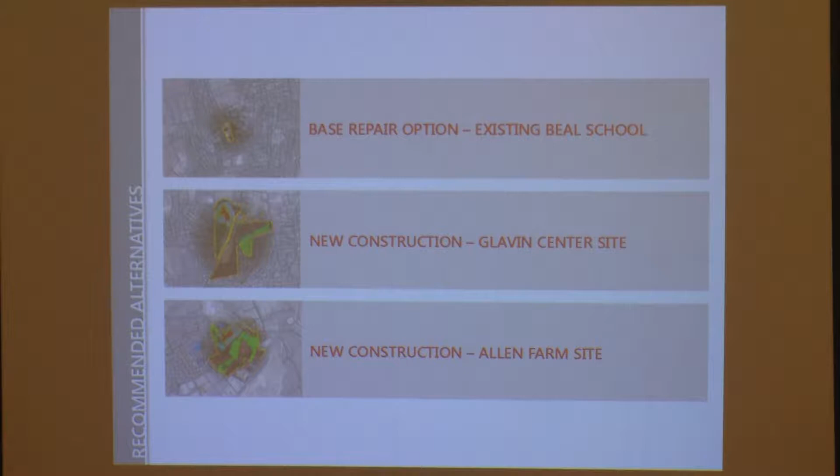We've been working with district representatives for the school, and we've also been working with town representatives. We came up with an educational program that was written by the school department and headed up by Amy Clowder. That education program really informed what this building is going to be and how it's going to support the education model.

From there, we looked at 31 sites to begin with. We got down to 6 sites that comprised 8 different parcels. Then we were down to 3, and now we're actually down to 2. The 2 sites we're down to are the Glavin Center site and the Allen Farm site.

As part of the requirements during the PSR phase, we had to look at 3 different options. The first one is kind of a benchmark where we look at the base repair at the existing site, to give you a sense of how much it would cost and what needs to be done to keep that going forward. What we're here to talk about tonight is sustainable solutions we can foresee for these possibly 2 new sites, looking at new construction.

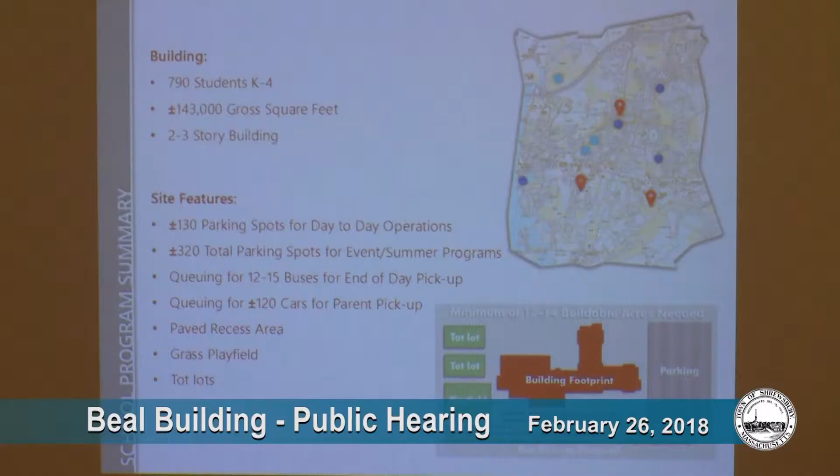What also came out of that educational program, I'm going to give you a quick background on what we're looking at as the new project goes forward. After we really looked at all the sites, we were focused on trying to provide a school in the southern portion of Shrewsbury, south of Route 9. So the two sites we're looking at both accomplish that need.

As far as the building, we're looking at a K-4 configuration. As you may recall, we were originally looking at a K-1 configuration, but the school department voted and approved to go to a K-4. It's going to support 790 students. Through our numerous iterations of the space summary template, we came up with a building of approximately 140,000 square feet, and we're looking at a 2 to 3 story solution.

As far as site features, looking at different counts at different schools for walkers, buses, parent pickup, and staffing, we're looking at needing roughly 130 parking spots for day-to-day operations, and 320 total for special events and summer programs. Some of you may know the summer program here for the extended year is very highly subscribed and popular. We'll also need queuing for 12 to 15 buses.

Parent pickup we foresee at both of these sites being quite high. It is quite high at a lot of the other schools based off the percentages, but given the location of these schools not being overly in residential neighborhoods like some of the other schools in town.

There's a paved recess area and a grass play field. To give you a sense of scale, we were targeting a grass play field similar to the size of the one at Floral Street School, for those of you familiar with the other facilities around, plus some tot lots. So that's targeting about 12 to 14 buildable acres.

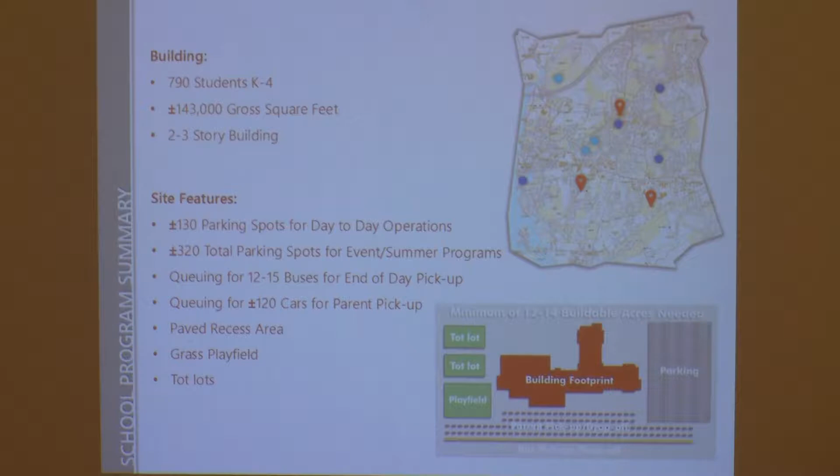What I'm showing you here is what we did during the PDP, a very early preliminary fit. We hadn't had time—and that's what we're getting into now—to come up with an actual floor plan that truly meets the educational program the district came up with.

But we came up with a footprint that was done—you may recognize it as Sherwood. We looked at it, grossing it up to the size we need here, and wanted to make sure these could at least support what we're looking at. So this was one option as a preliminary test fit, showing a circumstance at Glavin.

Another one for Glavin, looking at a slightly different orientation. And then the third one here you'll see is Allen Farm.

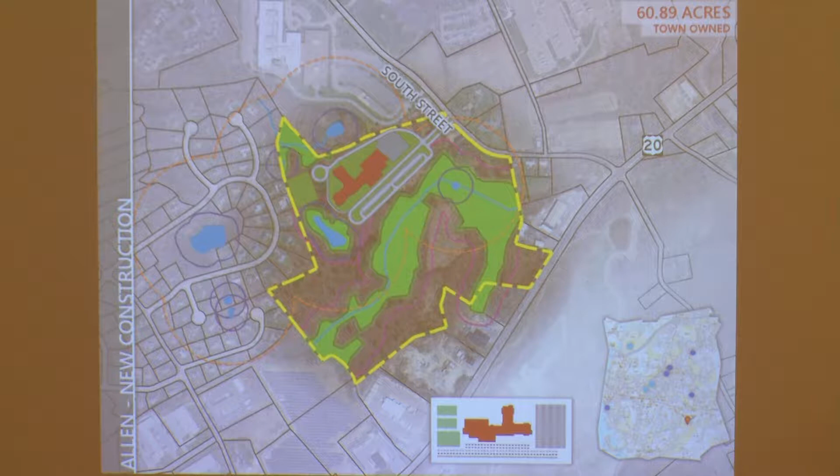As you may or may not know from previous meetings, Allen Farm has some quite large hydrology on the site—wetlands, potential vernal pools—that's really constricted the site and limited us to looking at the northern portion as developable. We foresee some site compromise probably on this site, but until we can really flesh out the building and test this site, we still think it will be able to support a school of this scale for day-to-day operations.

With that being said, anyone have any questions about what we've done to date, as far as where we are and what we're seeing? Otherwise, we're going to really try to get into the core of the program tonight.

Thank you. I'm going to invite Chris up, and he's going to take it from here. This is where the fun starts. Well, we hope this is where the fun starts.

So what we plan to do with the rest of the evening - I don't know if everyone's seen the agenda - but we were going to start with a vision and goal setting exercise to get a sense of what Shrewsbury cares about for this particular project. We have a pretty good sense of that already, but it's good to do it and create a set of shared goals through that process.

And then from that, we're going to dive into specific aspects of sustainability and work our way from the outside of the building in, talking about all the different elements that might go into this project, understanding that we're still at a very early stage. We don't even know exactly where this building's going to end up yet.

So sustainability might be one of the things that informs the decision of the site, for example. Once we go through that, we're going to talk a little bit about the different certifications that are potentially available to us. We're interested in that in part because, as an MSBA-funded project, if we want MSBA's money, we have to meet one of these certifications. So you have a choice of being a LEED project or a Northeast CHPS project, and you've done CHPS in the past in town - Sherwood is a CHPS project.

So the connection here on the larger scale—never mind the Worcester County Food Bank is right there—there are some great opportunities for the site to have that greater discussion of outreach between nonprofits, with site amenities that are in there in and of itself.

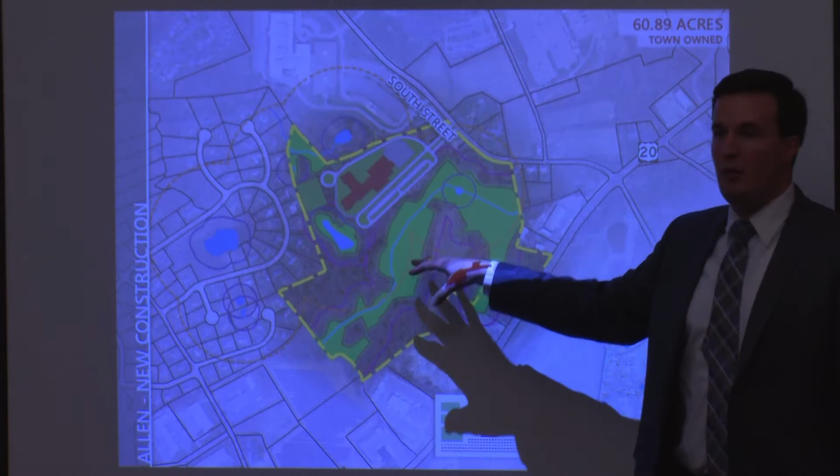And the same goes for South Street, with all of its hydrology and wetlands—it is a huge learning tool. Obviously we're going to be conscious of not disrupting or adversely impacting the wildlife, but I've always seen this as a great opportunity and teaching tool for the students. I think both sites have different opportunities to really engage students at this level, and it's very appropriate to the curriculum currently enforced in the district.

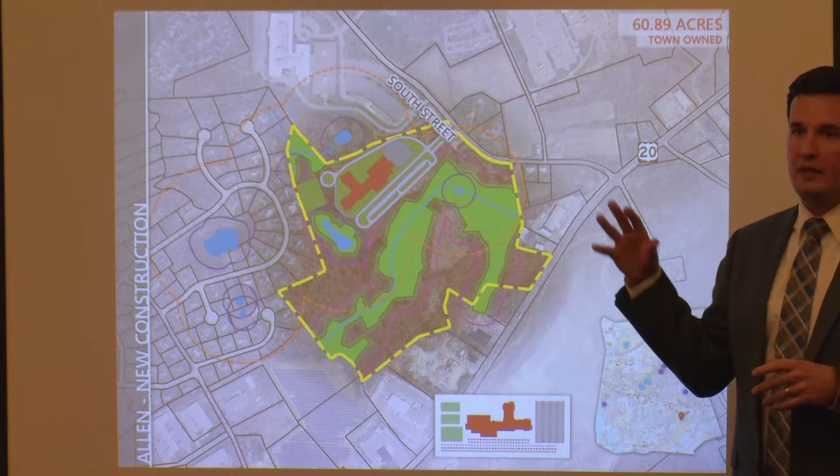At the South Street facility, you'd have opportunities for boardwalks, possibly working with community land trusts where some other programming could be. That could definitely happen, but I think in some respects it would be something that would happen after this project. Due to the permitting track, I think it could cause a lot of hiccups and delays if we try to incorporate it into the base program.

But I think it would be a great initiative for the town to entertain as an option if this site was selected to move forward. I would hate to see it become a real snag for the whole project, since we're really trying to focus on this one educational thing that could be incorporated afterwards.

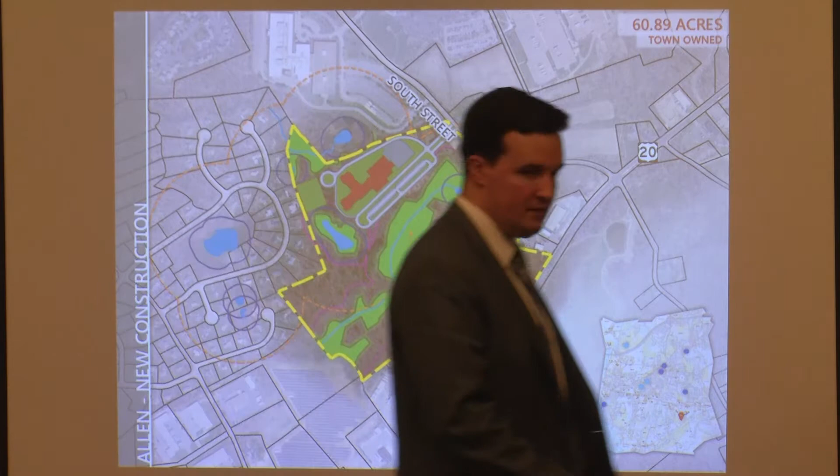So, almost everybody familiar with the two sites? Anyone not familiar with the two sites? I think a lot of people know.

Just to be clear, is there still also an option of an existing site? That is going to be the benchmark for the kind of comparison of what it would cost the town to stay in this building. So as far as the project being approved, funded, and moving forward, we're actually looking at new construction at either one of these sites. So that site's just there for a theoretical exercise? Yes. Got it.

And to really inform the town, because they have a redevelopment committee too, looking at new use for that. So I think it'll be beneficial for them to understand some of the systems, egress, or other deficiencies there.

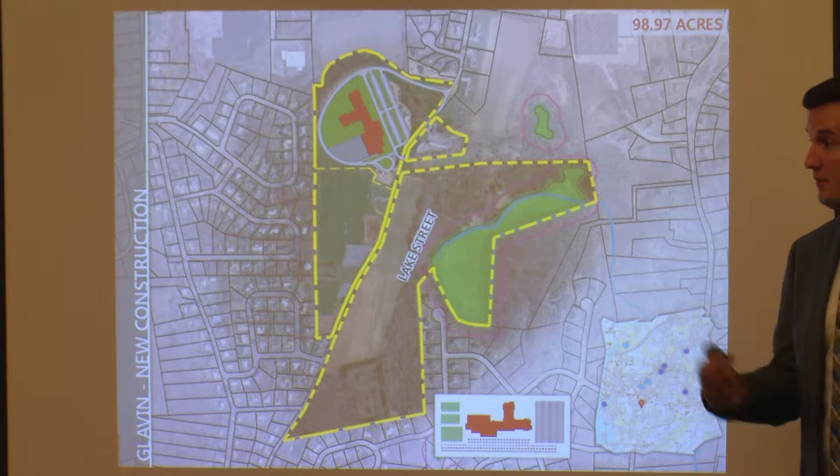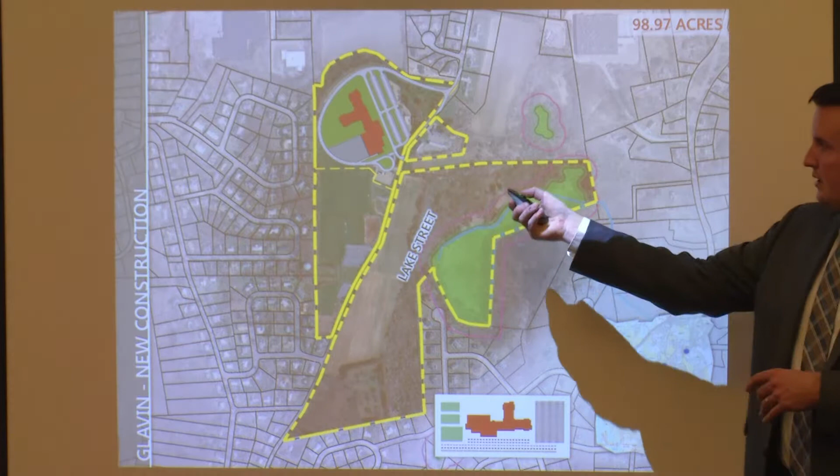Okay, so as far as Glavin Center goes, the area we're focusing on is the upper northwest portion. I don't have an existing site plan, but as you know, the Glavin Center is currently housed between three interconnected structures in this portion, and then a separate building that was a school, a kindergarten area, which was the temporary library when you guys did the library renovation, for those who may have visited during that time.

There's quite a significant change in grade here, with both vertical and horizontal road alignment issues coming through. As far as pre-construction, this used to just be a rolling hill. If you look at a lot of the topography, it used to roll right up - it was this nice rolling hill. The views out towards UMass and Lake Quinsigamond are quite nice to the northwest.

So the things we're going to be dealing with here - Jared will know - is that we've got to keep the grades between 5 and about 8% for roads. You really don't want to go much higher than that. And as you may know, for handicap accessibility, a ramp is above 5%, but to be a sloped walk, which doesn't need guards or handrails, it's at 5%. So that's another huge factor in getting access and being inclusive and welcoming to all those who will be visiting.

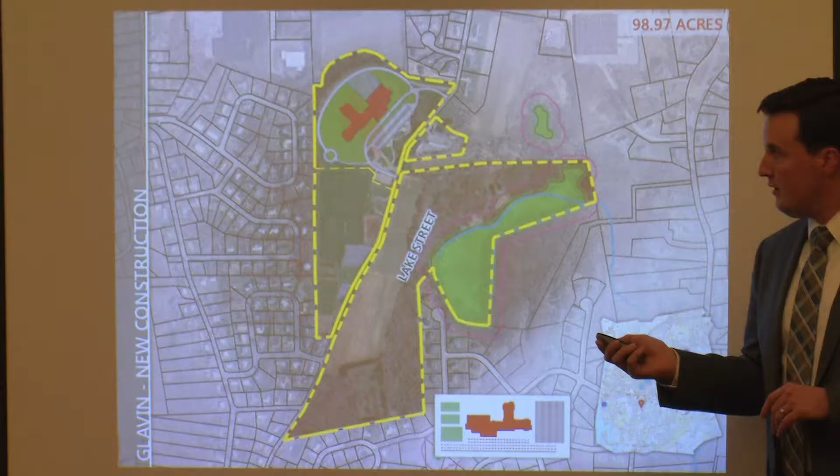I don't know if there's something you want to add at the moment. This site, I think, gives us greater opportunities as far as developable area configuration and orientation, for sustainable solutions like daylighting, capturing microclimate aspects such as prevailing winds, and even passive heating options. Whereas on South Street, we're a little more limited in how much we could rotate the building one way or another. But we could still orient windows and the building as much as possible to capture those aspects.

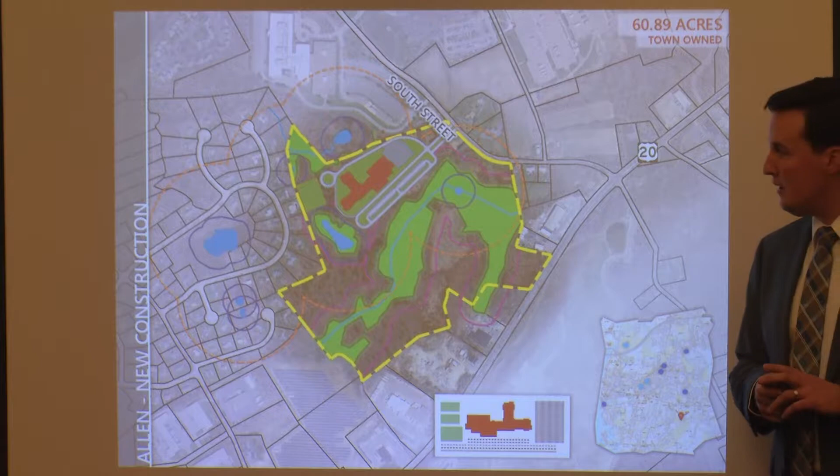This site - Jared, maybe you could comment a little bit on the stormwater strategy. Sure, could we go back to the previous two slides? We'll start with that one.

Again, Jared Gentilucci with Nitsch Engineering, I'm the project civil engineer. I don't get a lot of opportunity to talk about stormwater because people tend to fall asleep, so this is a good opportunity for me. So talking about the Glavin site on Lake Street - from a stormwater perspective, this is actually a pretty good site. One of the big benefits is it's already developed. We have a lot of structures there, a lot of pavement.

Sean mentioned there's some topography change across the site, but we can usually manage that with grading throughout the site - we can make that work. The fact that it's developed helps on the stormwater side because we already have existing flow on this site. We have a lot of parking lots, roadways, and buildings. We're looking to basically do a similar type of site - obviously much different design, layout, and facility - but from a stormwater perspective, it's very similar.

We don't have great soils on this site - the other site's very similar, we'll get to that in a minute. So we have fairly low permeability rates in the soil, so we're somewhat limited in what we can do with recharge. We always like to promote recharge and sustainable, low-impact development options for stormwater - things like water quality swales, bioretention basins, porous pavement, and so on. If you have sandy soils, you can implement those to your heart's content and they usually work really well. You can still use them on a site like this, but with low permeability soils they don't work quite as well, though we can still get some benefits from it.

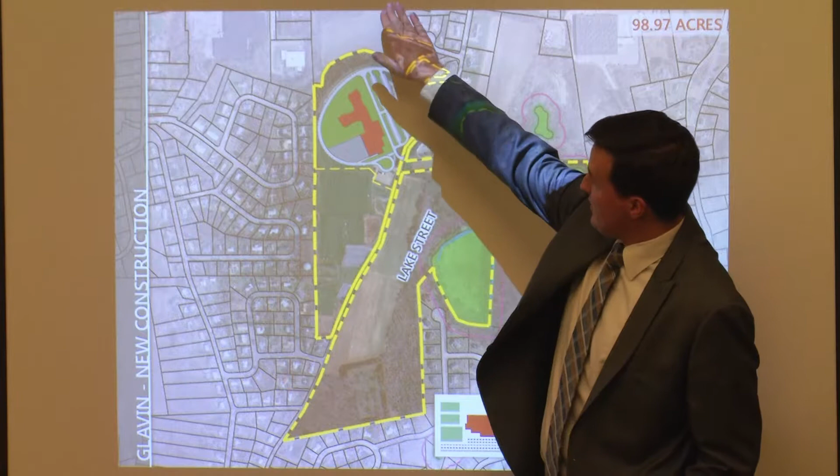Those that may know might notice that the land that's off here is actually up for lease right now, but it was actively farmed previously, and it abuts the Worcester County Food Bank, which has their main hub right there.

Is there any site contamination? Are we going to dig and find out we need to get rid of oil tanks or something else on site? Do we know anything about that?

In the meeting we just had prior to this, we've been actively gathering more information on the sites as we go. We did a phase 1 assessment of this site already. We did a desk study for the geotechnical. We were fortunate that they had the boring logs in locations from when they did the original construction, so we're using that to suffice for geotechnical soil capacities at this point.

As far as what came of the 21E, in this smaller portion where there's some barns and storage facilities, there's one underground storage tank a permit was put in for, but there's no current records if it actually even went in. So that's really the one thing we got to look at.

One thing we're looking at in general for both of these sites is that Shrewsbury has high arsenic levels in general in the soils. We are going to be testing for that, so we can understand what we can or cannot do with the soils on-site or off-site. But there's nothing of huge red flags, like mercury or something else—they weren't using or manufacturing pesticides or other nasty stuff at this point.

I could speak to the arsenic a little bit. We deal with arsenic levels really in Worcester County on a lot of projects. I have multiple projects right now, actually working with Lamoureux Pagano on Worcester South High, and we have a lot of arsenic in the soils there too. It's not considered contaminated necessarily, but it's naturally occurring, and you do have to deal with it.

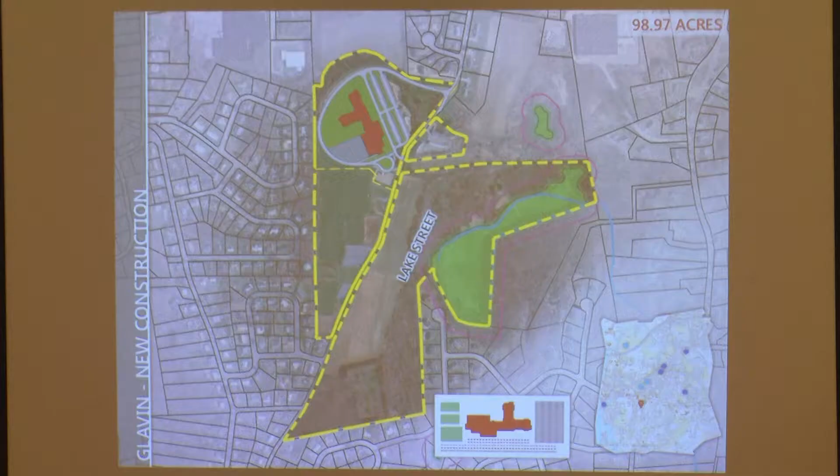Just to clarify, we plan on doing this for both sites now, and it's really going to be a traffic impact study. It'll look at the existing loads—real counts as they exist now—and then the theoretical loads, which is all we can do for the school, and the trip generation from it. That's what Niche will be doing with us.

I have two comments about that area—I'm very familiar with Lake Street. There are two things going on there. As you go south, down on your map, that area floods really bad, and the drains get clogged up very easily. There's also a certain time of night it fogs up pretty fast. And there's a lot of wildlife up there—hordes of turkey. They come out around dusk and they're all over the place, a lot of them.

Yeah, I saw two turkeys this evening behind the funeral homes. Yeah, a lot of turkeys. And I think because of the turkeys, there are also coyotes that howl at night out there. So just put that on your checklist or something.

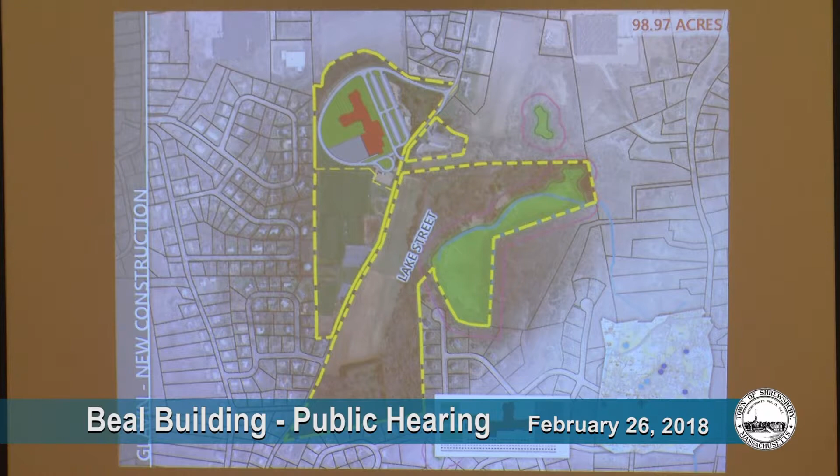Just to speak to the stormwater part—so that's further south on Lake Street? Yeah, it's Hilaire Street. As you come down, it's right where you can take a right and go back there. Every once in a while that gets bogged down.

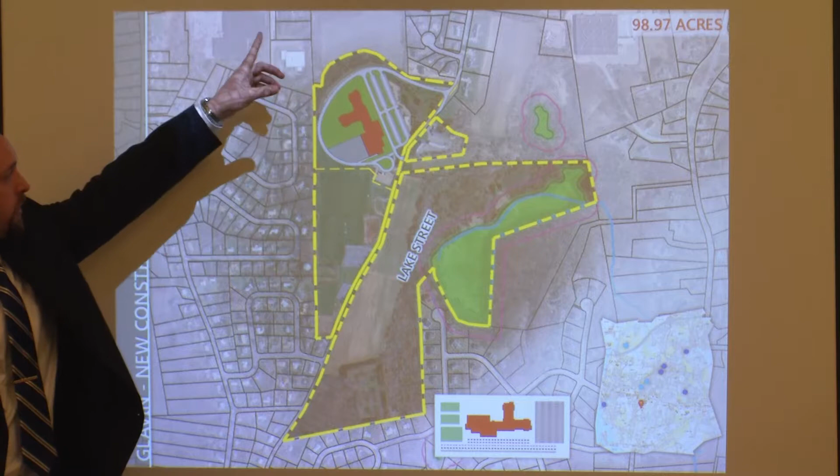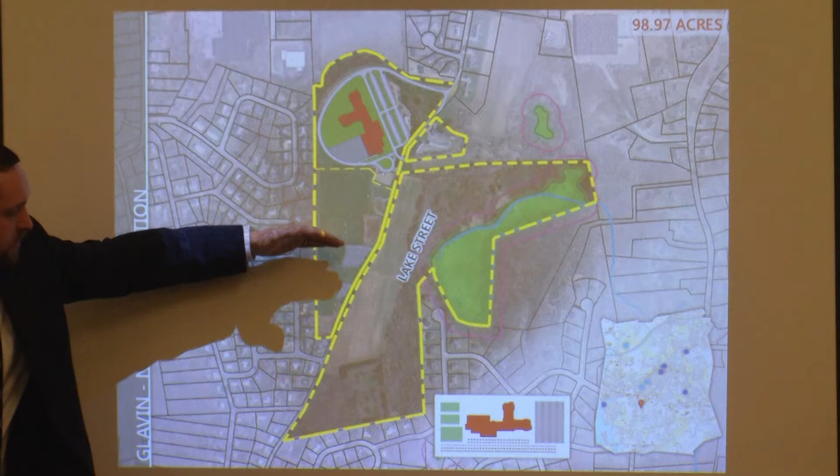Flooding issues, yeah—so is what you're proposing there going to help that situation? It absolutely will; we certainly wouldn't make it any worse, and our goal is always to make it better. A lot of stormwater on the existing site in the northern part actually runs through a drain line in an easement that I believe goes up to Route 9, so a lot of stormwater goes out there today. We like to mimic where stormwater flows—we don't like to change flow patterns or the amount of stormwater that goes to design points. We'd try to mimic the existing condition. Topographically, a lot of this area and most of the field pitches this way, but the proposed design would look to make it better.

Also, there are no sidewalks in that area. So you've got a stretch—I don't know how many—it's quite populated. The area to the west of that is quite populated too.

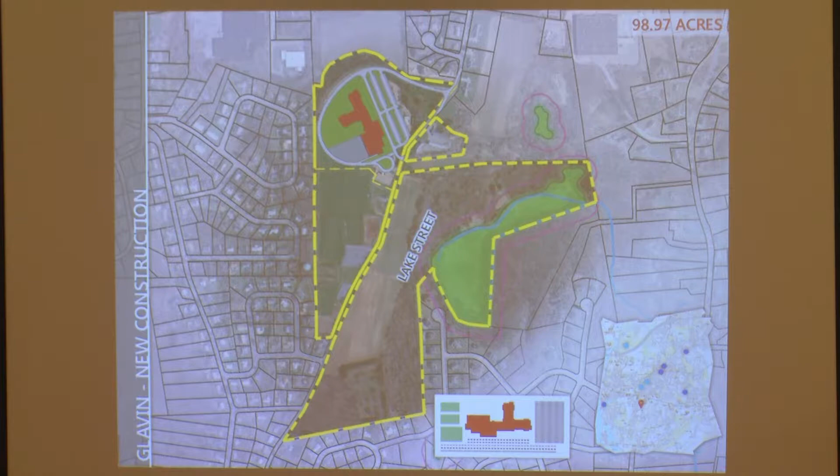That's a good point—let's take a quick look. I want to make sure we get done by 9 o'clock like we promised, so there's a lot of stuff to cover. Let's go to the next site.

In general, the traffic and site access study is going to be a separate study that will inform this. We're trying to find out whether there are other sustainability issues that would make us prefer one site over the other.

I'll talk real quick about the South Street site. Unlike the Glavin site, this site—as Sean mentioned—has a lot of wetland flowing throughout it. We have multiple bordering vegetated wetlands, an intermittent stream that runs roughly northeast to southwest through the site, and another one in the northwest corner as well. I believe there are at least three vernal pools on the site.

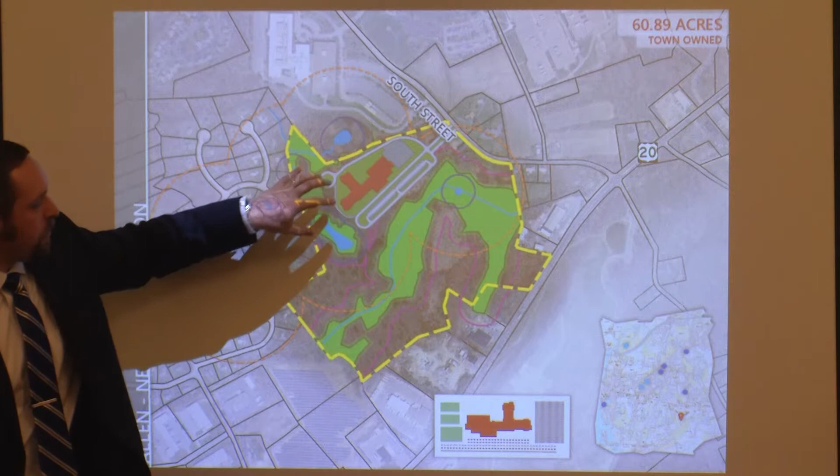Potential vernal pools - so we're dealing with a lot of wetland resource areas. Obviously, we want to minimize impacts to those areas, and what you're not proposing is development directly in them. The idea is you propose your development as far away from those areas as possible. What that does for this site is it really concentrates the development area in the northern portion of the site, and it squeezes it quite a bit.

One of the other issues with this site, and it's typical with sites where you have a lot of wetlands, is we have pretty poor soils, low permeability rates. So from a stormwater perspective, this site would be much more challenging. Obviously, the permitting with wetlands would also be a challenge.

I think we could do it, we can make it work. But from a stormwater perspective, most of this site is undeveloped, and that's the big trigger with stormwater - we'd have to do a lot of mitigation in order to meet the regulations. So I see that as probably one of the biggest challenges on this site, just because there's very little development there today.

In general, a principle of sustainability would be that we'd rather build on a site that's previously developed versus building on a site that hasn't had development on it in the past. But that stormwater piece is an important one. The requirements from the state and from the Conservation Commission would be that you don't make it any worse. So in the case of a site that's already developed, it's pretty easy to make it better. But on a site that is undeveloped, you're going to do a lot just to not make it worse.

Are there other things about the site that we want to talk about at all? A couple of things that come to mind around sustainability are things like the landscape and the planting materials, and things like needing irrigation. Honestly, I don't know - do the other schools in Shrewsbury typically have irrigation systems, or do we just say it relies on the water that's available?

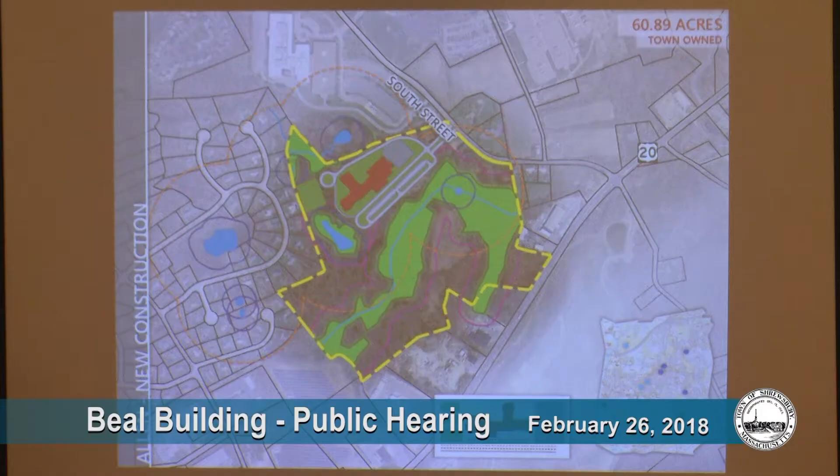I think going back to the specific site question—is there any difference between these two sites as far as space that might have solar either now or in the future? Certainly parking canopies we've seen as an option, but schools that have buses and parking canopies aren't always compatible because of the height of the buses, so we'd have to be careful about where those went. But I'm not aware, are there differences between these two sites that would affect that one way or the other?

Well, we have more latitude with the Glavin Center site in terms of positioning of the building and the parking or any other features than we do at the South Street site. That's kind of basic—on this site, pretty much what you see for a footprint is what you're going to be able to do. Well, I think we have some latitude within that, but not much.

And the Glavin site—Sean showed a couple of different options, and there are many more with that. So I would say, in terms of orientation, the Glavin site probably has more opportunity to really use that as a focal point versus here. Here, we're going to have to find a way to maximize and optimize the program on the site that's available, make it function really well, and sustainability might have to become less of a priority in that regard than the opportunities at Glavin Center.

Okay, that sounds like a good place to transition, maybe. Let's just do water briefly, and we'll come back to this issue. I certainly don't want to put this off as an important discussion that everybody seems to want to talk about, but yeah, let's talk about water.

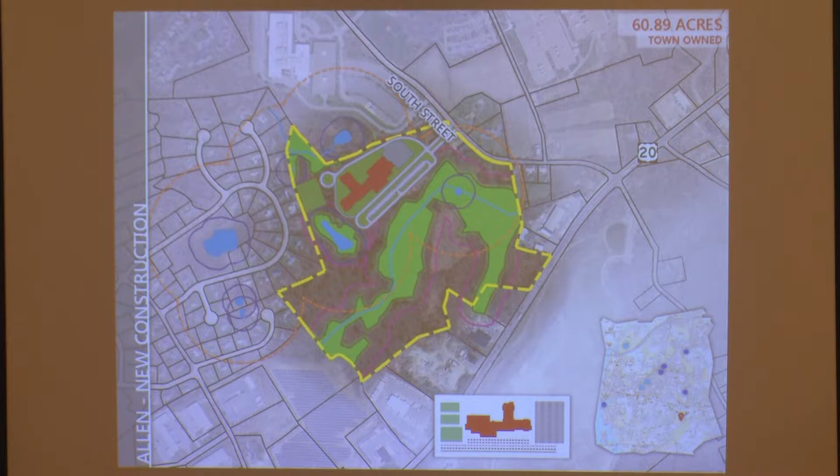Where the developed area of the site is situated, it's a little bit higher than the rest of the site. So I think as long as you provide proper drainage for the building foundation and pitch away from the building using standard engineering practices, I don't see any major concerns with groundwater causing problems on the site. There could be some challenges during construction with dewatering, especially with the silty soils—when they get wet, they're hard to work with. But I don't see major concerns with water issues at the building, like basements flooding, since we're a bit higher on the site with the building siting.

So let's talk about water use inside the building, and I'll let Kevin talk a bit about what kind of plumbing systems we'd expect. Most of the water use—we talked about some potential use in the kitchen depending on dishwashing—but otherwise it's going to be primarily the toilet rooms.

What's a typical approach on a public school trying to conserve water? Typically we'll use low flush toilets, even ultra low flush toilets. Something we've learned over the years is to make sure we have a more aggressive pitch on the pipes, because even though code doesn't require it, if there are any bellies in the pipes, even in new buildings, it creates a potential problem with these low flow fixtures. The ultra low flush is 1.28 gallons per flush. We like to still use water urinals, but at 1 pint instead of 1 gallon. It's a very small amount of water use, but it allows conventional cleaning methods—a clean sweep of the surface with water—without needing the gel used in waterless urinals. So we tend to favor that approach.